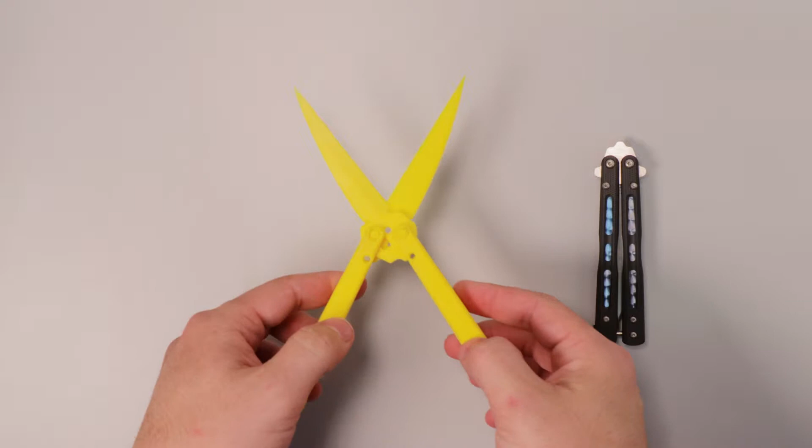It opens like a regular butterfly knife, but then if you press these two buttons, they're a little bit stiff. It becomes scissors. Another name for a butterfly knife is Balisong, so I call these bali-scissors.

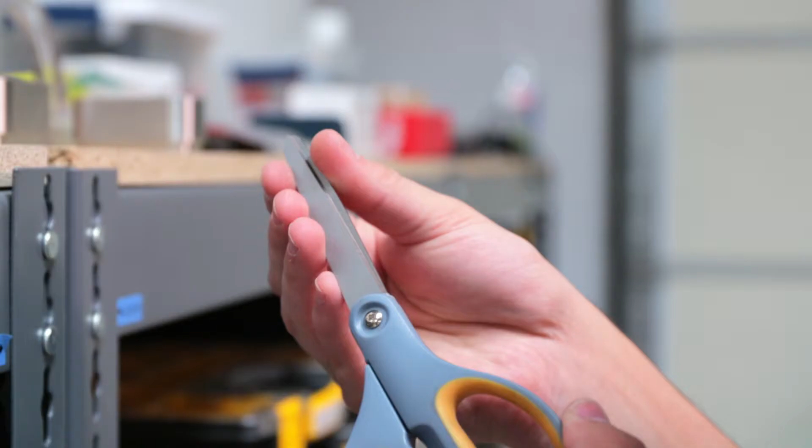The advantage of scissors is it has two safe edges instead of just one, but you can still cut things with it. You just can't close it on your fingers like with a regular butterfly knife. Plus, I think that scissors can be more precise than knives in certain situations.

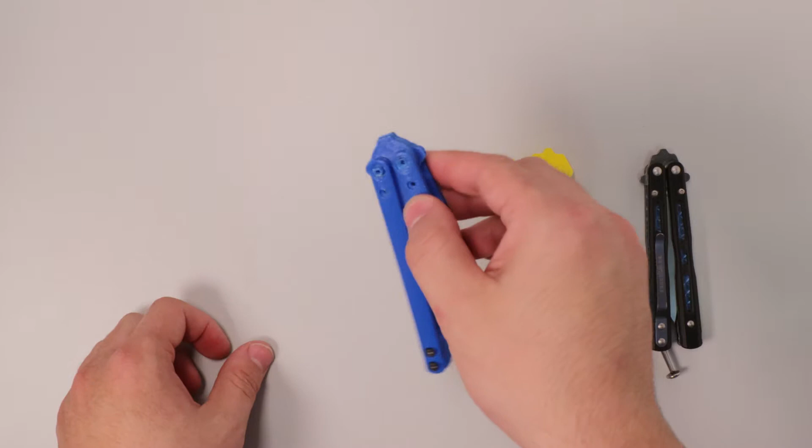This is version 2. This one's a little loose because I tried filing the holes to make them a little bigger, but maybe I got a little carried away. You can still see the proof of concept where I made the handles straight, which means that the same pins at the top can now be used to lock it closed, as well as to switch it over to scissors. This means I don't need a secondary locking mechanism in the bottom of the handle.

This is version 3. It has only one button instead of two. This makes switching back and forth between scissors and balisong much faster. It's a little loose, and on this one I even tried printing a little test jig with pins and holes to try to find the right size to compensate for the printer's tolerances.

My plan is to make these out of metal, and maybe even make these a real product that I could sell. But clearly these aren't quite there yet. So what I'd like to do is get back into Fusion 360 and just start over and make a fresh prototype. I'd like to make it more my own style, and I'd like to make it a little bigger.

I think that most people who like to do cool tricks or collect butterfly knives seem to like a little bigger size, and I think it looks cooler anyway. I'd also like to get the tapered handle back, kinda. The straight handle, there's nothing really wrong with it, but balisongs are kind of iconic with their tapered handles, and so I kind of want to get that back. So let's start drawing something.

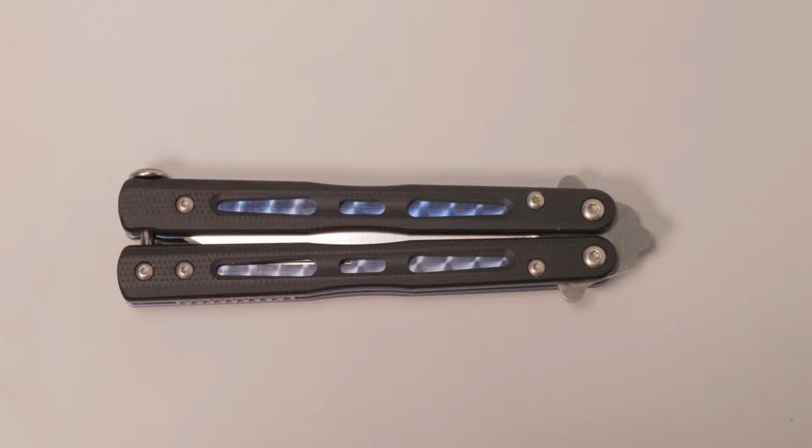I made the first few prototypes by physically measuring the dimensions of the knife I already had. Because I wanted to make a bigger knife, but I don't want the proportions to get too out of whack, I went to Reddit because, of course, there's a subreddit for everything, and I found a page of recommended butterfly knives. I found one of the more expensive ones and saved the picture just so I could have something as a starting point as reference.

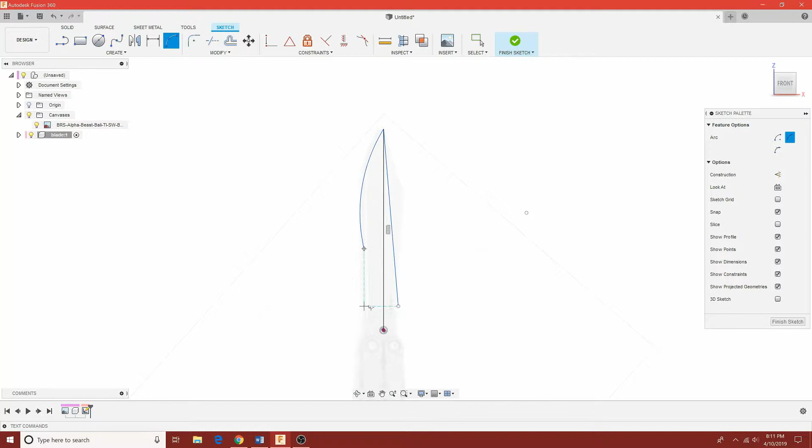I started by drawing the blade, and I added a little bit more of an S shape to the back edge of it because I wanted to have a little bit more of a distinct style, but for scissors, unlike knives, you have to have a perfectly straight edge on the cutting side of the blade. I then started drawing the pin and slot locations for the knife.

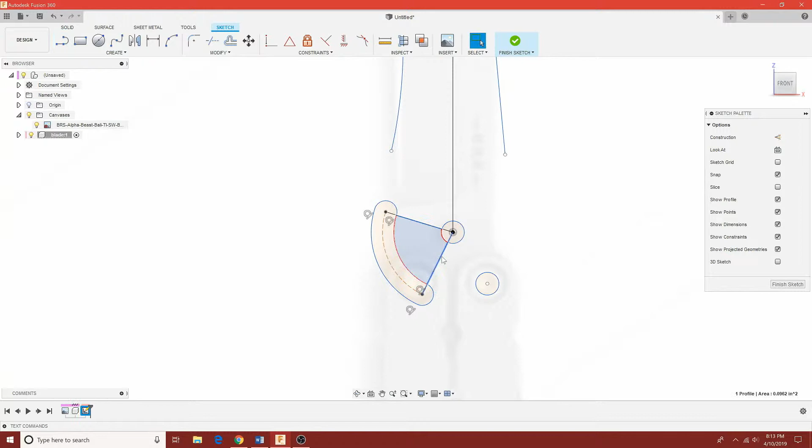There's a central pin that I actually didn't put in the 3D printed versions. This is probably another reason why they had so much slop, but the first one works surprisingly well without it. The pins in the handle simply slide along the groove, and because there's two of them and they're concentric with where they are supposed to rotate, relative to the center the pin is unnecessary. But because tolerances are never perfect, the center pin probably is necessary to have actual functioning scissors.

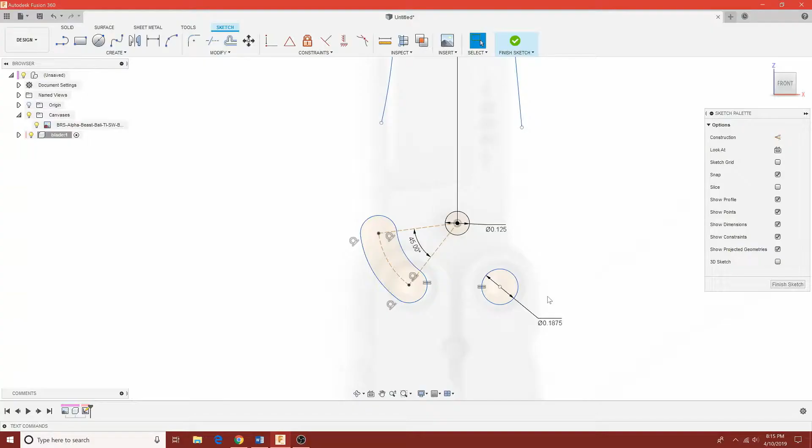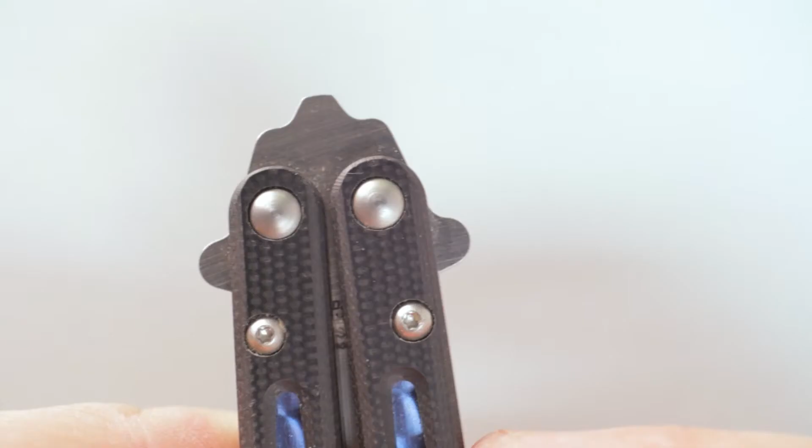I do this next step in a little bit of a strange way that kind of bites me later. Some butterfly knives have a pin in the blade that when each handle hits it, it stops the handle from over traveling. Some butterfly knives have pins in each handle and when they hit the side of the bottom of the blade, this also stops them from over traveling. If tolerances could be made perfect and there was no such thing as friction or wear, maybe you wouldn't need stop pins and the handles could simply stop by hitting each other.

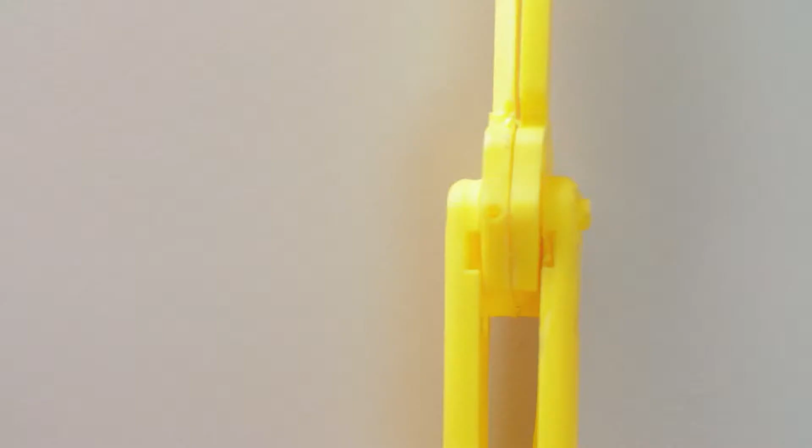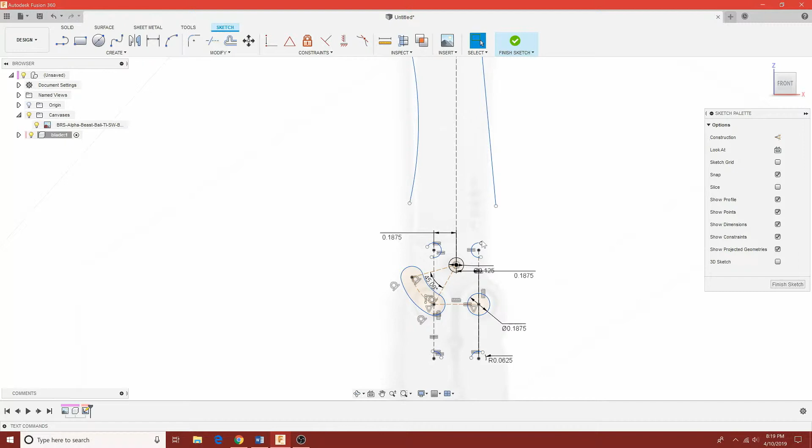You can see in this 3D printed version, I also didn't put these stop pins, and so the handles are free to wiggle back and forth and go past where they're supposed to stop at the center line of the knife, quote unquote. Between a center pin and pins in each handle, the choice became obvious as I experimented with designs. So why not a pin in the center?

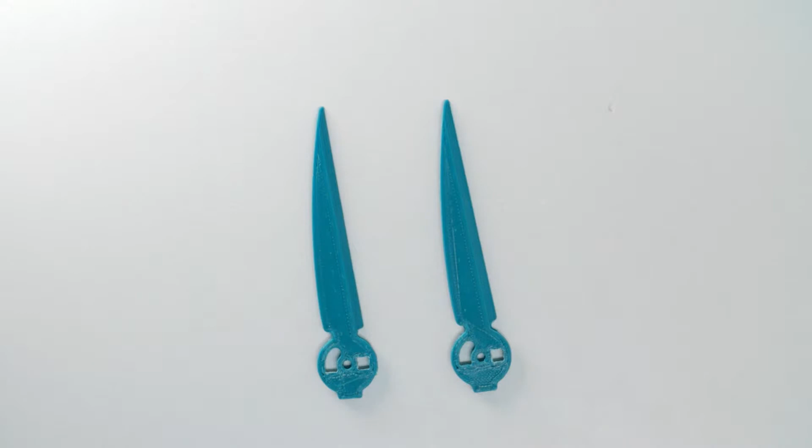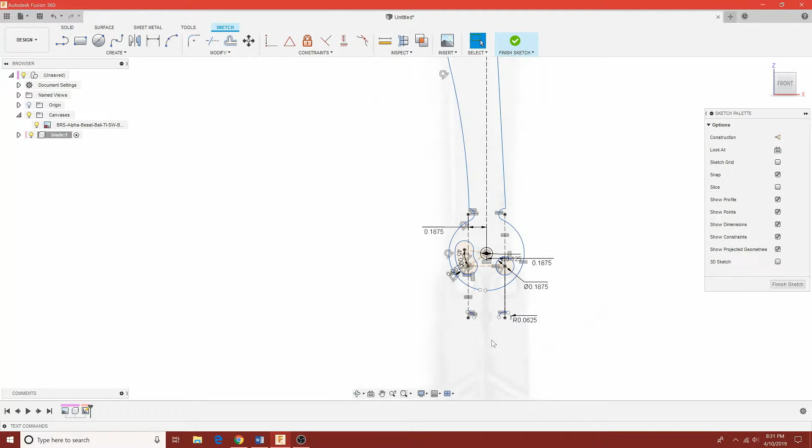The first problem is that I have 2 blades instead of 1. For ease in manufacturing, I'd like these blades to be flat and simple, and I can simply just make 2 of the same part and flip one of them over. But if I wanted to do the center pin method, I would need a pin that goes only part of the way through the total sets of blade thickness, or I would need one blade to be slightly different to give clearance for a pin to pass beside it when it was in scissor mode.

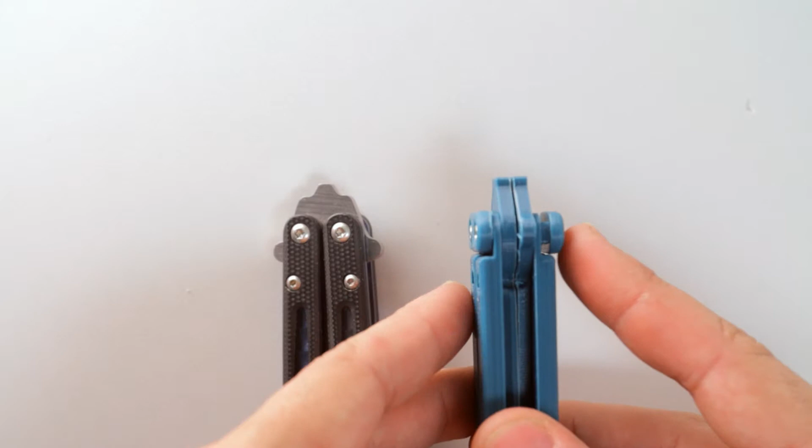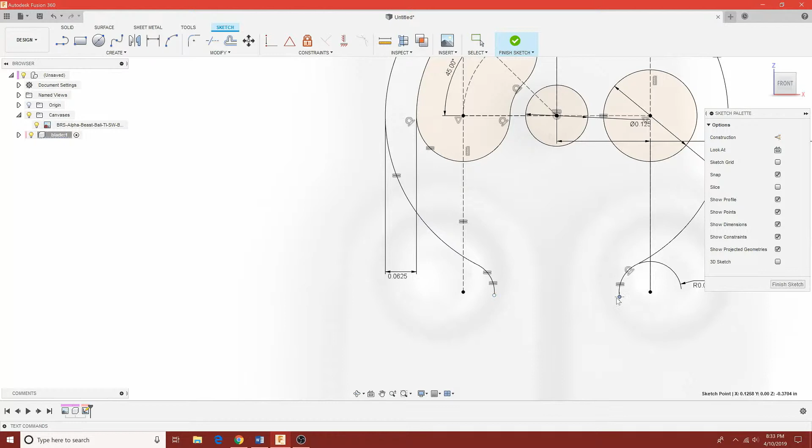Another advantage of the pin in each handle method is that with a normal butterfly knife, the center pivots that each handle rotates around are also used to sandwich the handles in place. Because I have pins that need to move up and down, they can't sandwich things together and hold them at the correct width. The stop pins also function as a way to hold the sandwich together at the correct width, meaning that the pins that the handles rotate around don't have to fill that role anymore. So we end up with simple handles and simple blades, and everything works out nicely.

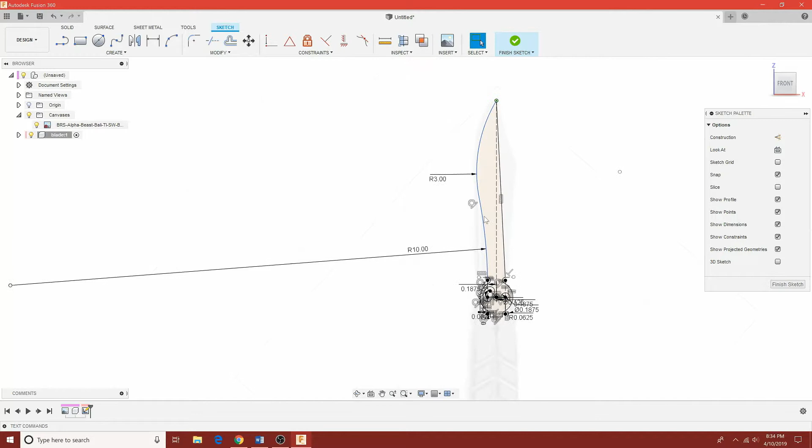On the knife I own, the stop pins are slightly to the left and right. This means that the handles are mirror images of each other. I also don't think it looks that nice. So I made the handles symmetric, which means I only have to make 4 of the same part. The disadvantage of this is that when the pin swings around, it has to go more into the blade itself. Hopefully this won't become a problem later, but steel is strong, and so it's more about the aesthetics of making it look good, I suppose.

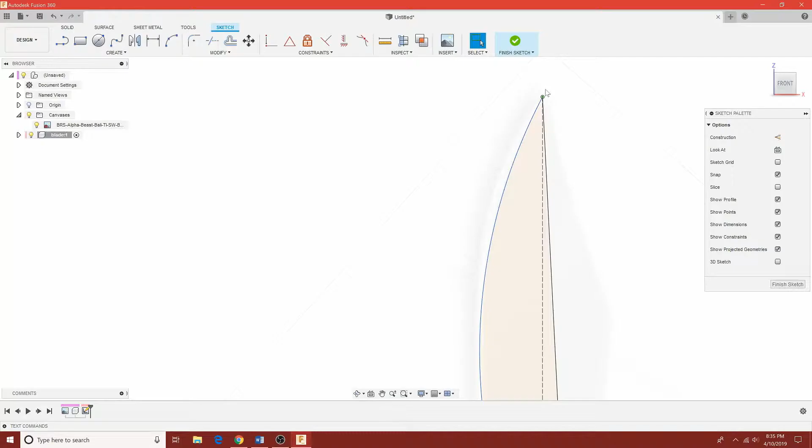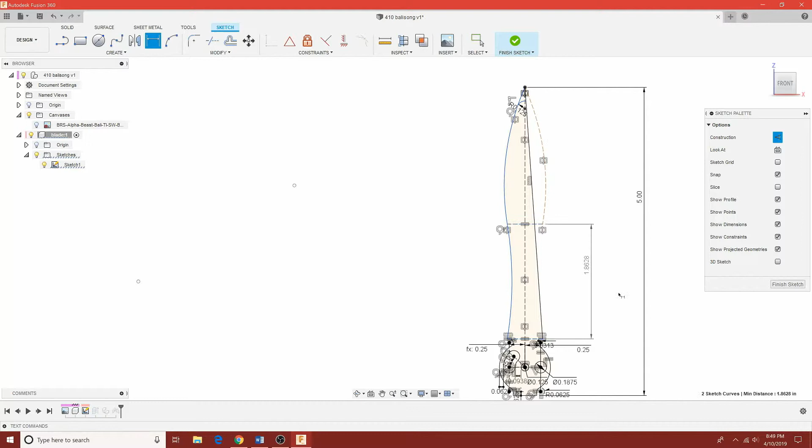Here I remembered that on previous versions I rounded the tip slightly. This is a bit of an aesthetic choice, but it also is probably helpful for the whole "this is safer than a butterfly knife" aspect of the scissors. It also adds a little bit of strength to the tip because sharp corners are fragile and likely to chip, but that's probably not much of a real issue.

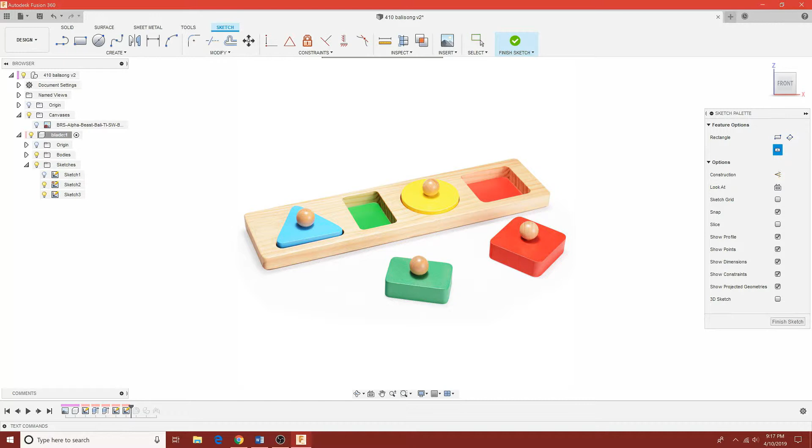The key way this mechanism actually works is based on the principle of a round peg can fit in a square hole. I decided to draw the square part on its own sketch because the original sketch was getting a little bit heavy and taking longer to load all the different dimensions relative to each other when I made a change. I also rotated the squares 45 degrees.

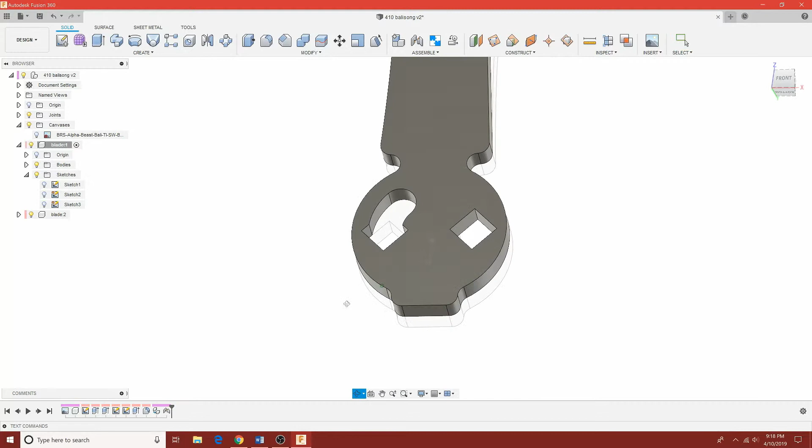This was done in an effort to improve the lengths of each side left when the square cuts through the slot portion of the blade. This also means that only one corner instead of 2 comes super close to the edge of the material, meaning that there's less weak points, but maybe that doesn't even matter.

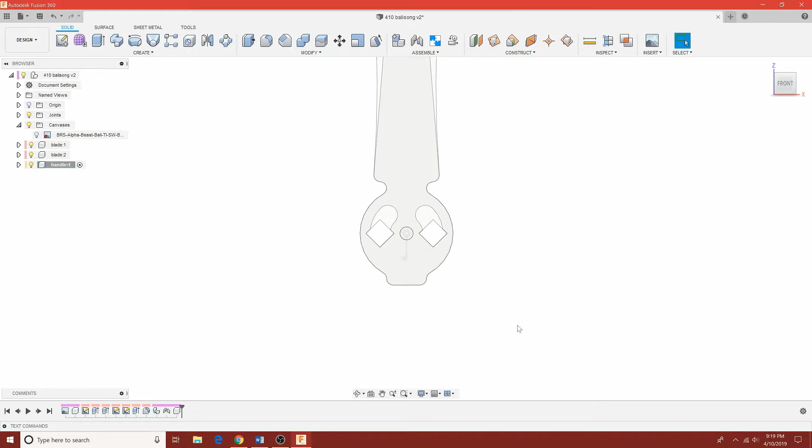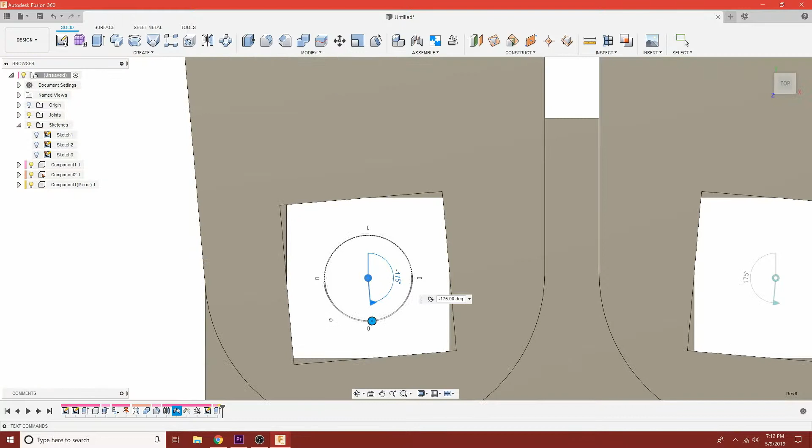If a butterfly knife's handle has a taper of 5 degrees, then this means it only has to rotate 175 degrees to fully close. What this means, though, as I explained earlier, I can't use the same pin to lock it in the closed position. I still kind of want a tapered handle, though, and so I tried getting around this by just letting the blade make a full 180 degree turn, but putting a taper on both sides of the handle.

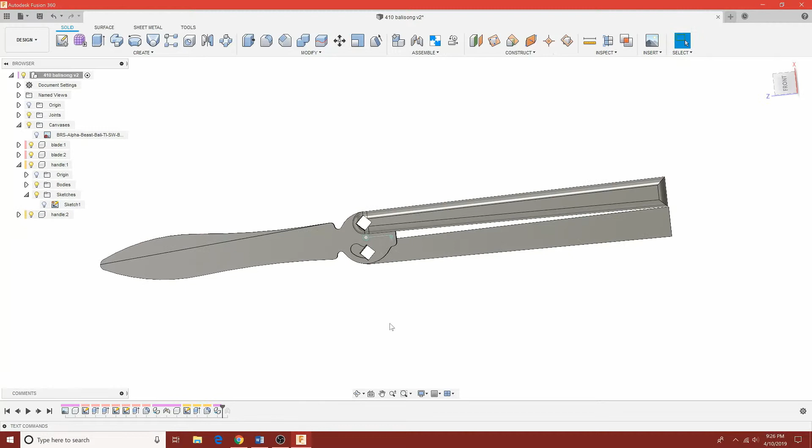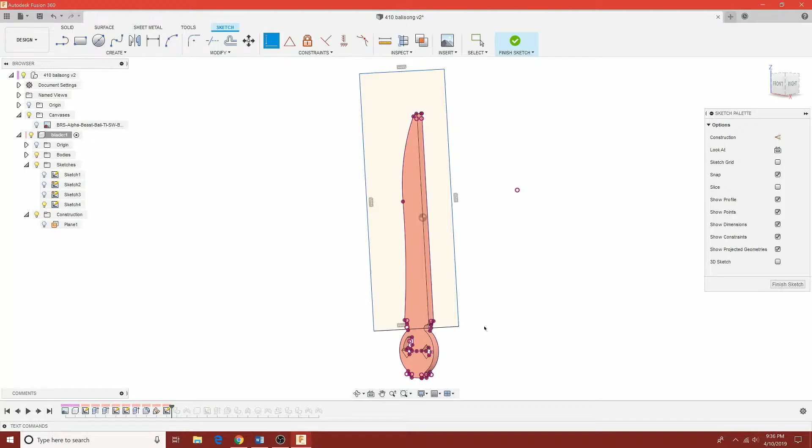For those who may not know, if you hit Shift N, it changes the colors of the components so that they're all different so you can tell them apart easier. Here's where I add an actual edge to the blade. If you look at different scissors, they can have a huge variety of different edge angles. Because scissors have a shearing action, they don't actually need to be that sharp themselves. If you look at metal shears, they're not sharp at all, they just push the metal apart.

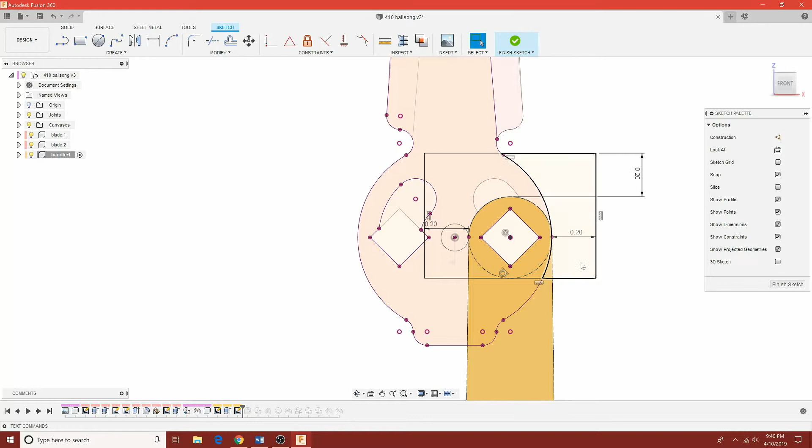I could use Fusion's built-in chamfering tool to do this, but I want the edge to come to a stop right in the middle of the groove where the stop pin goes. There is a step in the handles to reduce the height of the button in either position. This is so that the button doesn't snag as much on things. It also reduces the total thickness of the knife.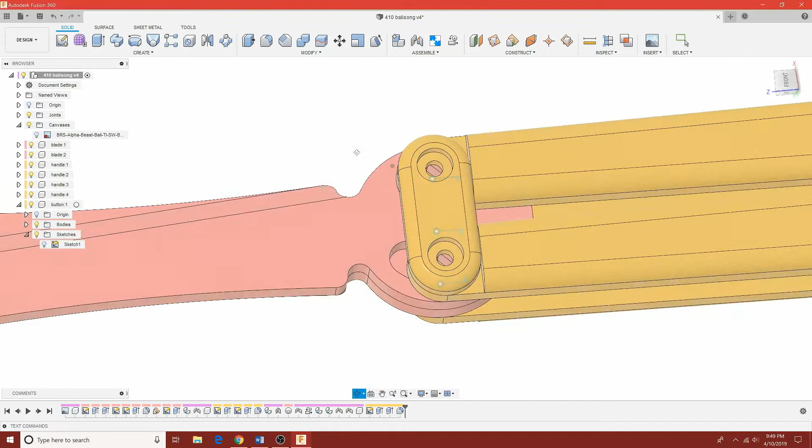Because all of the components are linked together in one way or another, it kind of creates a strange linkage mechanism where the button has to be able to rotate without getting stuck against the handles when the scissors open and close.

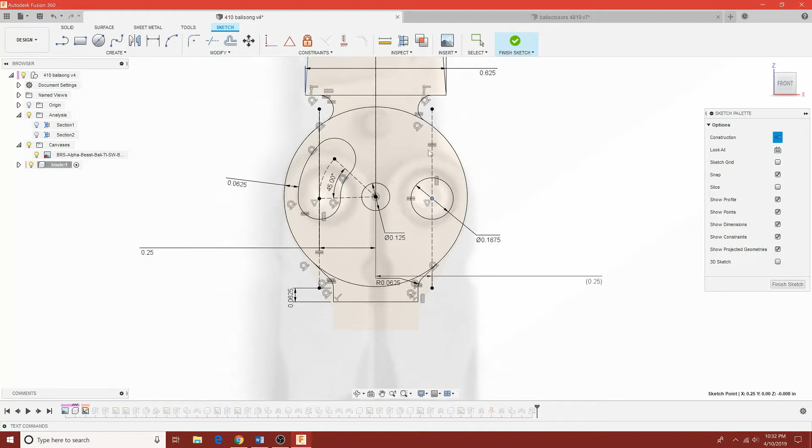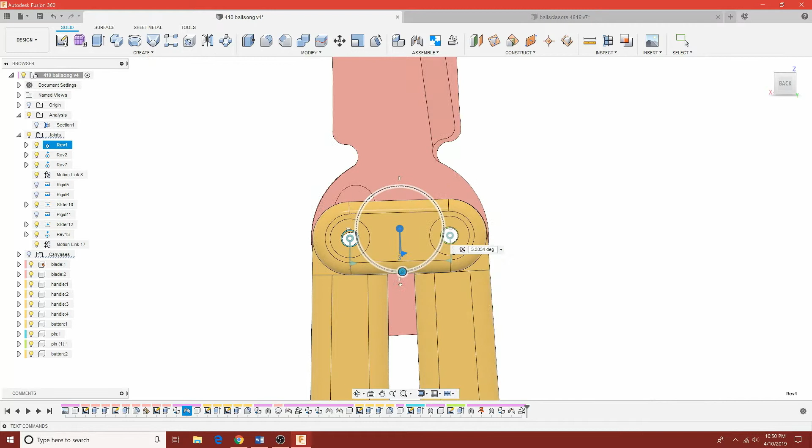This affects the channel placement for some reason that I don't completely understand and is hard to explain. There's only one angle for the starting pin location relative to the center pivot where the button holes for the screws that connect to the pins end up in exactly the same place as they began when the scissors are both open and closed, where the center of the pins is concentric to the holes in the button. This angle happens to be 45 degrees.

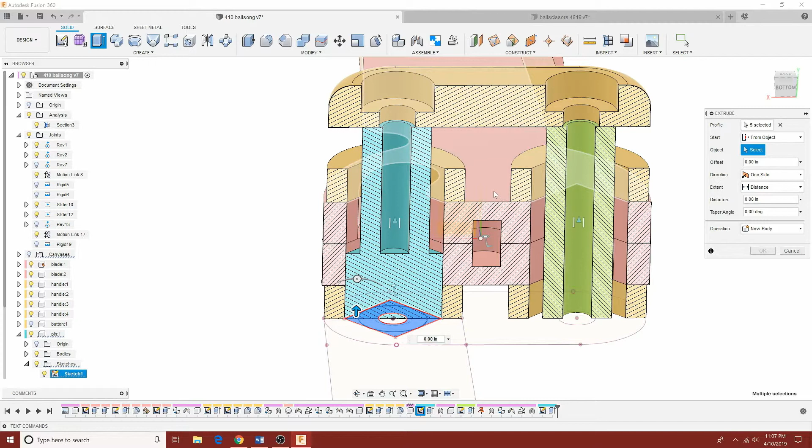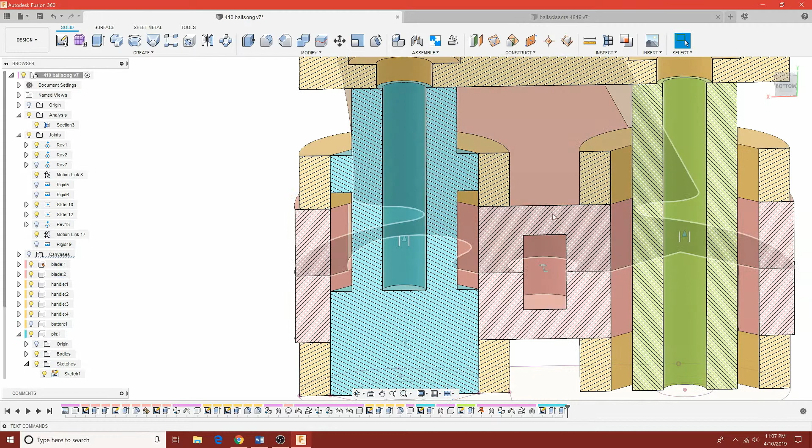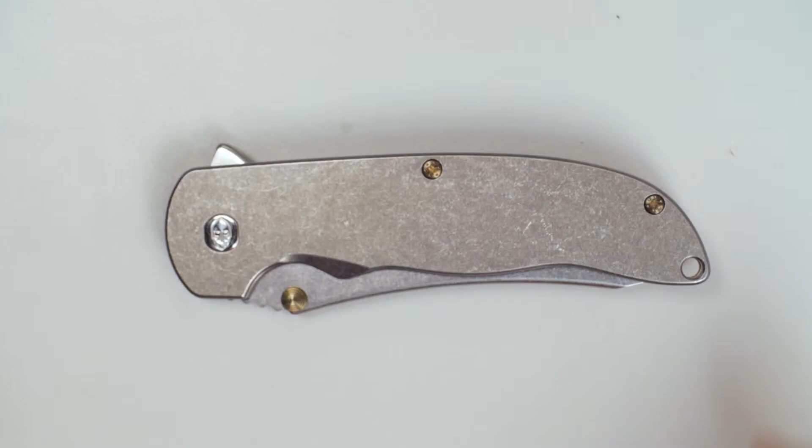The pins are made up of round and square cross sections. Where the square part's located is determined by what components it needs to lock up in which state. The round bit has to have clearance so that it can slide in the groove as scissors, but it needs to lock together when it's just flipping the handles open. It doesn't really take that much to lock up two pieces of metal, and that's both a blessing and a curse. If you look at a liner lock folding knife, it really only barely touches when it locks up.

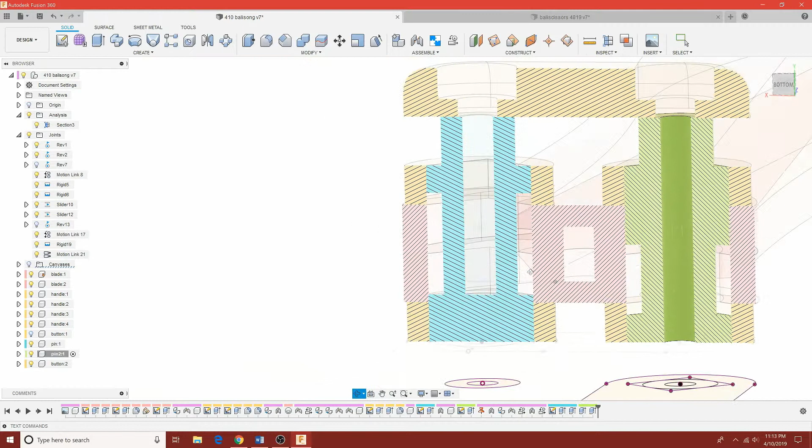So you can imagine that the way I originally designed this, where the square components extended the full length of the handle thickness or the blade thickness, that it would completely lock up the knife if I accidentally made the square component of the pin just slightly too long. And so I made it slightly too short, which gives me some safety clearance. And it's still probably locking up more than a regular folding knife. But because everything is linked, this is something I had to mess with quite a bit before I was happy with it.

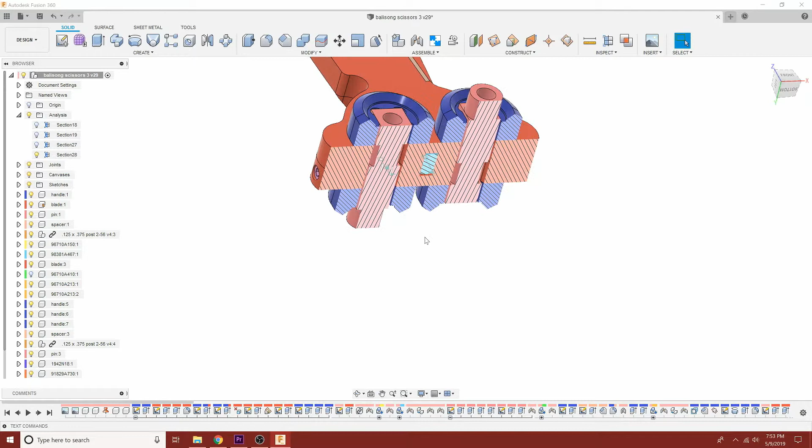On my versions that use two separate buttons instead of linking them together to make one button, both pins could be the same. They're just flipped 180 degrees. But the pins have to be slightly different now if they're linked together, because they're both moving in the same direction, but different heights have to serve different functions with each pin now.

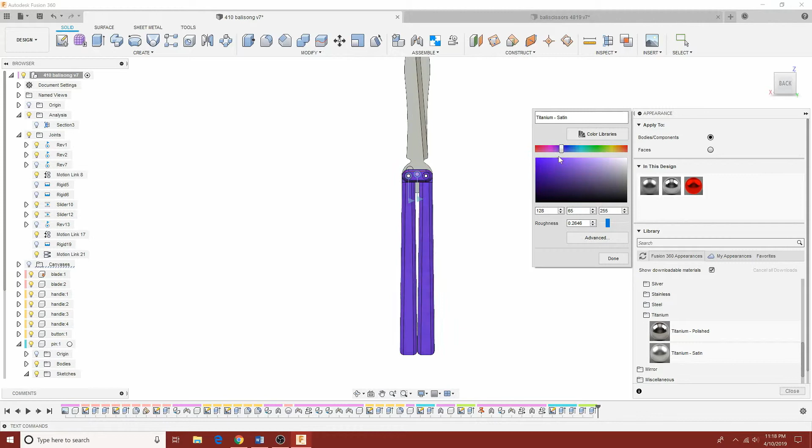I guess I was getting a little bit excited about how it was going, so I decided to mess with colors for a bit. I thought the pill-shaped button on my last prototype was kind of boring, so I started experimenting with what other shapes might work. I also tried putting a little divot for your thumb.

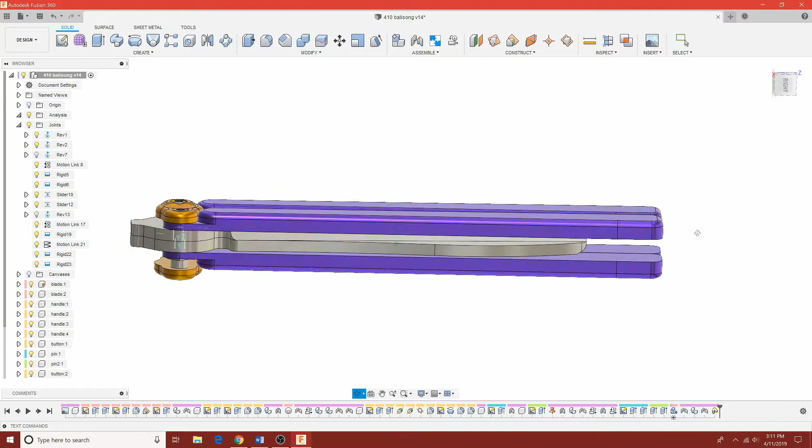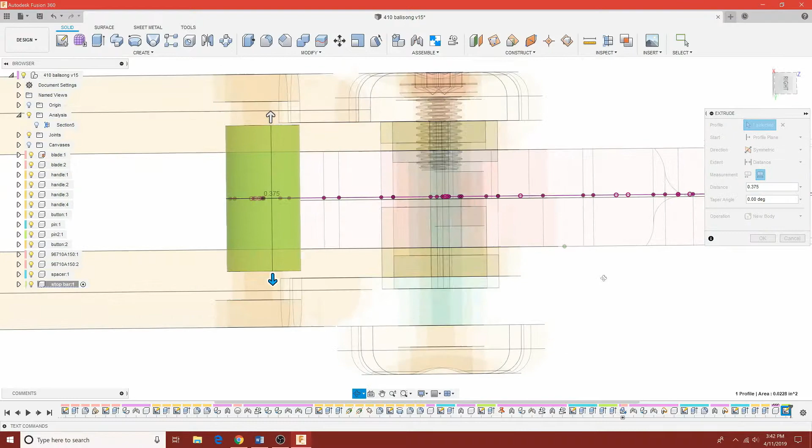Here I make the spacers at the back of the knife. They're pretty simple, just a 2D shape with some holes tapped in them. And I made a stop pin, but I really should have just grabbed the model from McMaster because that's what I ended up using. I wanted to use some from a knife website, but they were out of stock, and I don't know if they would have ended up being better or worse anyway. Now it's time to 3D print it.

So everything was a little bit loose in general, but for some reason the screws in the bottom spacer area, only the front ones on one side were loose enough that they could fall out. Everything else screwed together fine, but just those holes on one side seemed to be a little bit too loose, which was kind of strange.

I didn't notice till after I was done recording that there's some burrs in the little groove where the stop pin hits on the blade that was preventing the handles from closing all the way. And so that's why it might look a little weird in the next shot. It turned out good though. I think that it's a little bit long. I think I'd like to cut things down on both ends by like 1/2 inch, but I'm happy with it. There's still lots of things to figure out though.

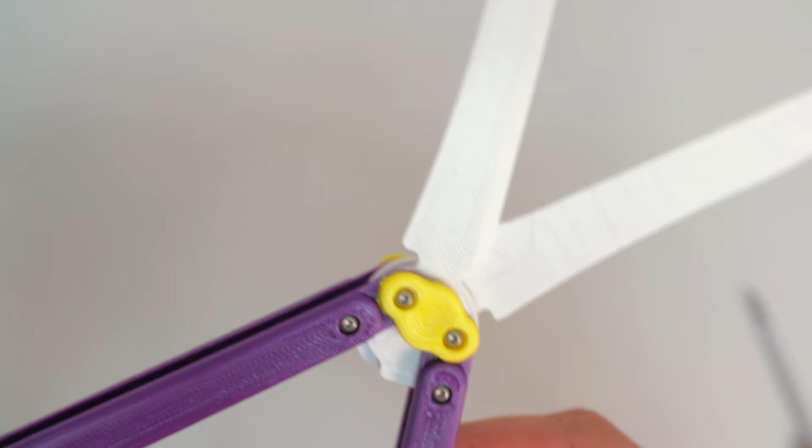Like maybe you've already thought, shouldn't scissors have like finger holes or at least a spring? And what stops the button from just flopping around constantly? Shouldn't it click into place in either side? And I have ideas for all these things and more, but I'm just trying to not be a perfectionist and just get stuff out there, get a real world prototype and just try things instead of constantly going for perfection and always just being stuck in the design phase.

And I'm trying to take the same approach to videos. I still have a lot to learn from a video editing and audio engineering standpoint, but trying to learn as I go, and hopefully things look and sound okay and they'll get better. And hopefully the next video is even better because I'll be using some real metal and do some machining and make an even better prototype of the Baliscissors.